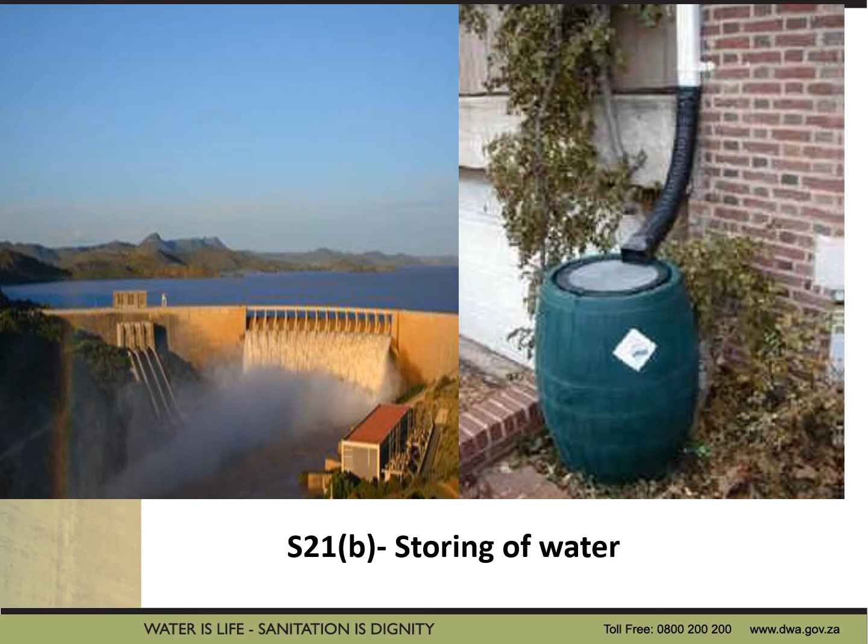We have Section 21B, which is storing of water in any impoundment. It could be an off-channel dam, in-stream dam, or even a JoJo tank.

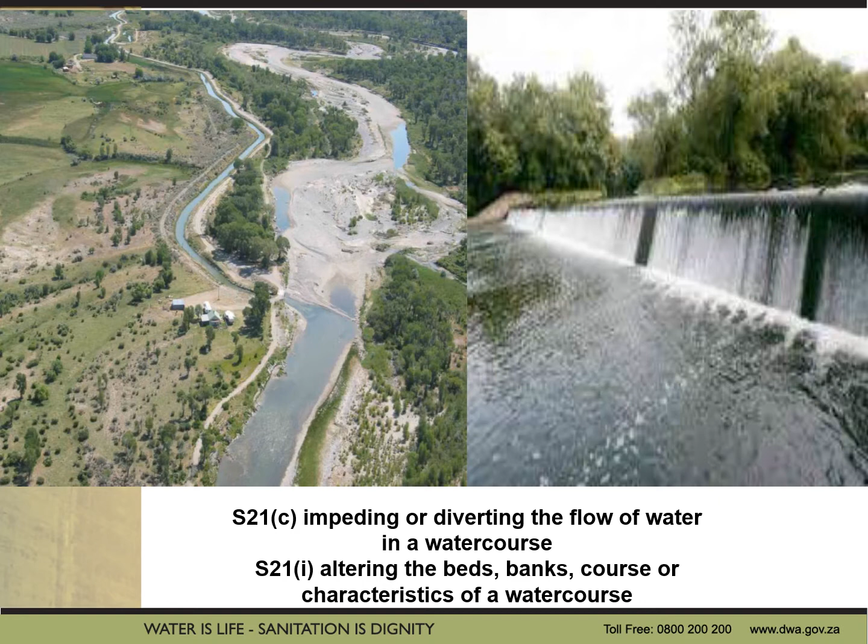Section 21D is engaging in a stream flow reduction activity, such as afforestation or plantation.

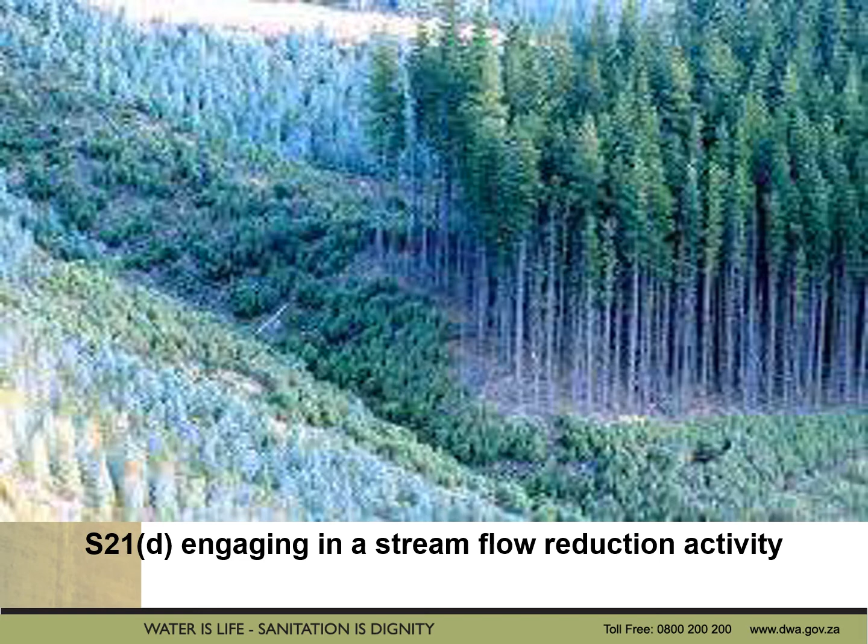Section 21E is engaging in a controlled activity identified as such in Section 37, subsection 1. An example of that is irrigating with treated effluent.

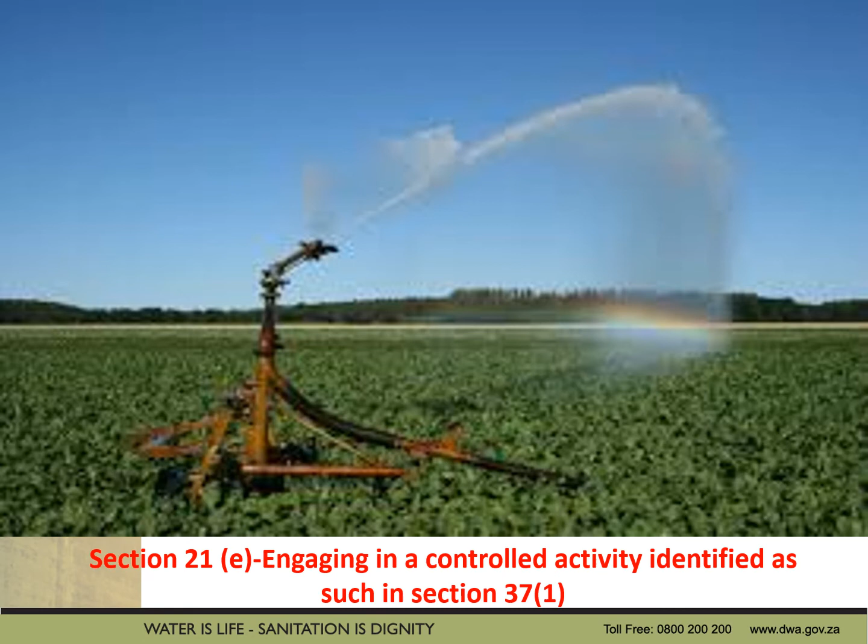Section 21F is discharging of waste or water containing waste into a water resource.

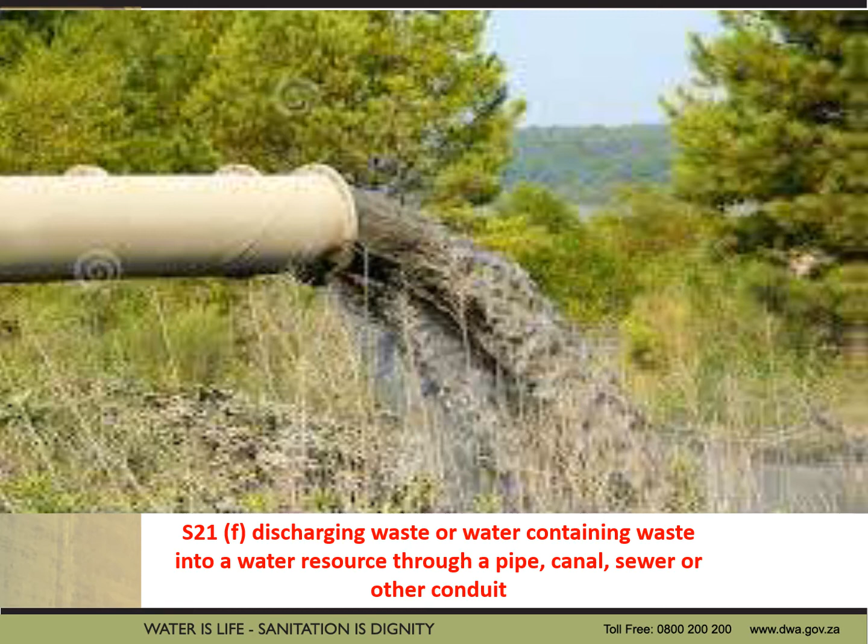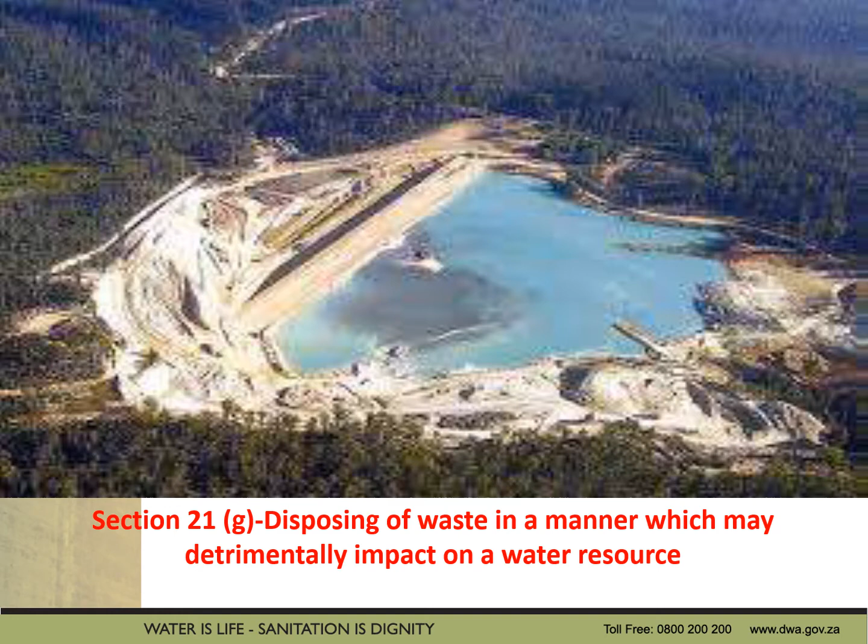Section 21G is disposing of waste in a manner which may have a detrimental impact on a water resource. An example is oxidation ponds or evaporation ponds.

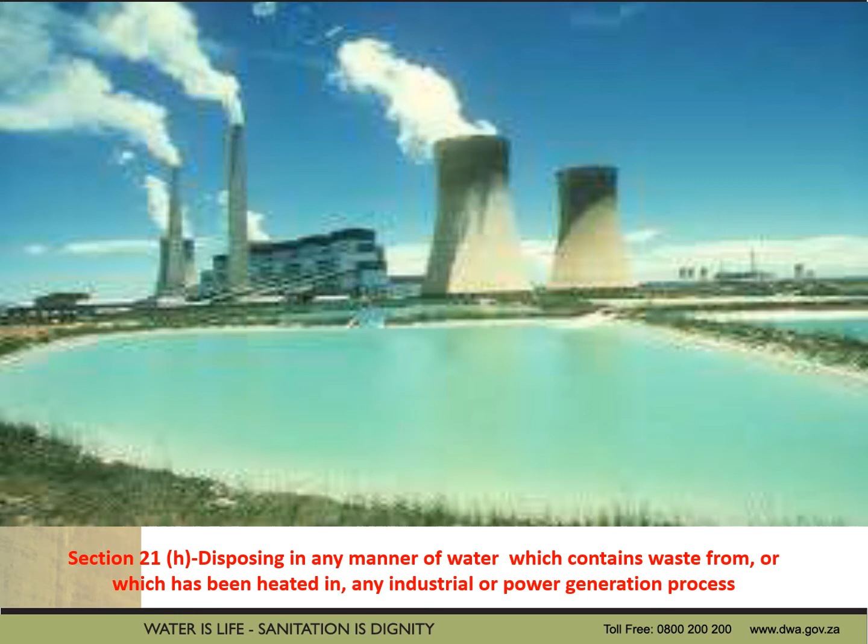Section 21H is disposing in any manner of water which contains waste from or which has been heated in any industrial or power generation process. So the difference between 21G and H is that G was never heated, and 21H is wastewater that has been through an industrial process.

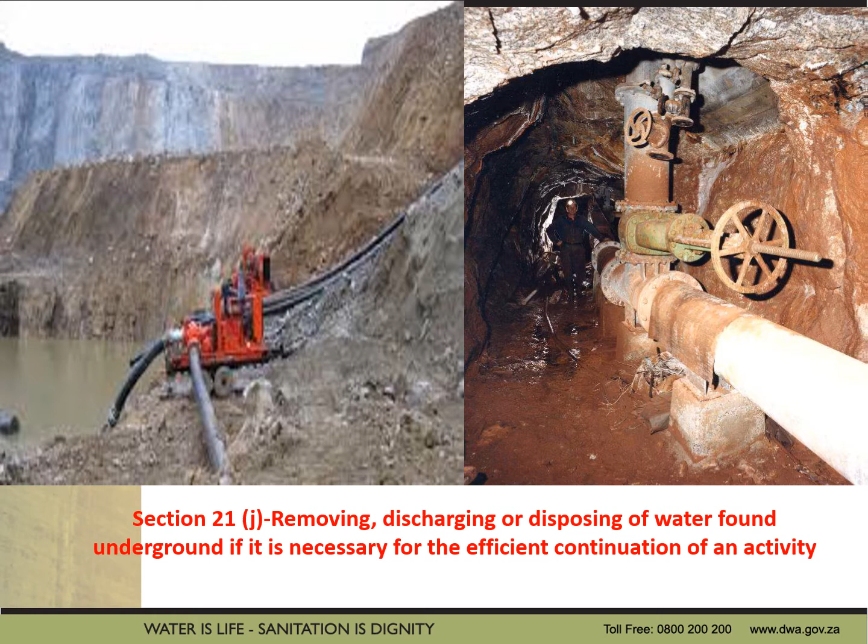Section 21J is removing, discharging, or disposing of water found underground if it is necessary for the efficient continuation of an activity. This is normally for mining activities wherein water is dewatered, so that mining activities can continue.

Lastly is Section 21K, which is using water for recreational purposes. An example is swimming or even canoeing.

Let's look at the strategies developed by the department to keep water resources healthy by controlling the impacts from the water use activities we just discussed.

Number one, we have resource directed measures. These are measures developed to protect the water resource for their sustainable utilization. RDM consists of three important aspects. Number one is classification, which is setting of appropriate levels or classes for protection of a water resource. We have the reserve, which is the quantity and quality of water required to satisfy basic human needs by securing basic water supply for the people, and also to protect aquatic ecosystems in order to secure ecological sustainable development and use of the relevant water resource. And number three, we've got resource quality objectives.

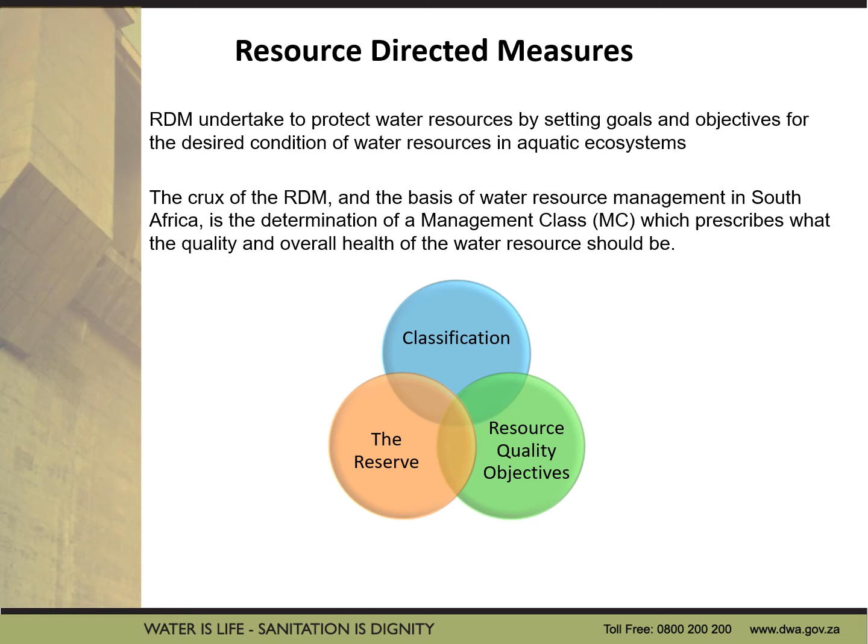This provides goals within the management class. They are set by the minister during the process of classification of significant water resources in South Africa. The main purpose of the RQOs is to establish clear goals relating to the quality of the relevant water resource.

The second strategy is the source directed measures, which specify criteria for controlling water resources activity and their associated impact on the aquatic ecosystem. They are imposed through the water use authorization, be it a license or a general authorization, through regulations and best practice guidelines, and also by providing incentives to water users.

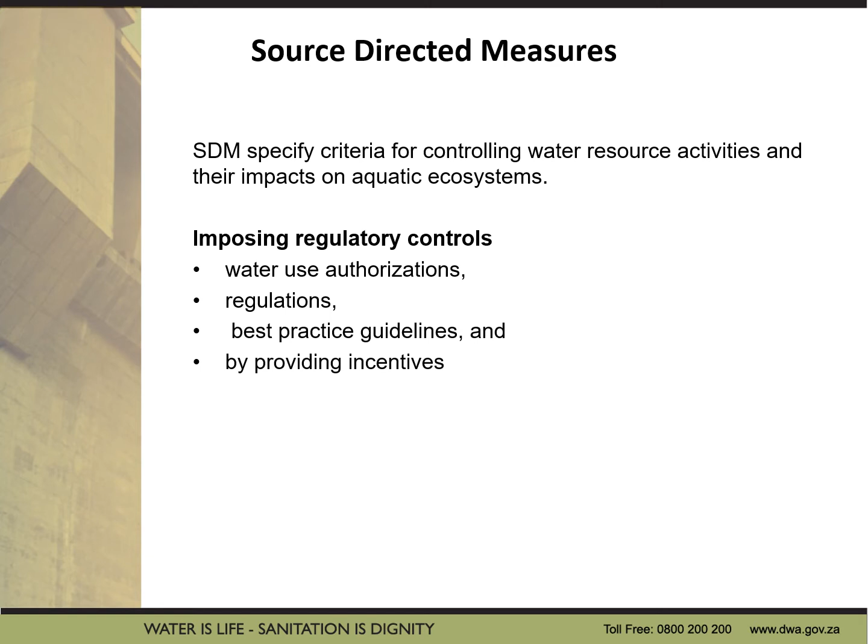Section 22 of the National Water Act provides 5 different ways in which water users could be authorized. We've got Schedule 1, which is mostly using water for reasonable domestic use, taking water for drinking, or irrigating your small garden, but it should not be for commercial purpose. Also abstracting for livestock watering, storing water from your roof, or using water for recreational purposes.

Number 2 is general authorization, where the department issues a notice in the government gazette authorizing a category of persons to use water subject to the conditions stipulated in that gazette. We've got general authorizations published for water quality related water users, for C and I, and for A and B water users. If a water user falls within the ambit of a general authorization, that water use must be registered with the department, and the general authorization is only valid and reviewed every 5 years.

Number 3, we've got existing lawful water use. This is the water that has been lawfully used during the qualifying period. If the water use was not used during the qualifying period, it may not be declared as an existing lawful water use. This existing lawful water use is determined through what we call the validation and verification process, where the extent of the water use is validated and also verified if the extent was lawful during the qualifying period.

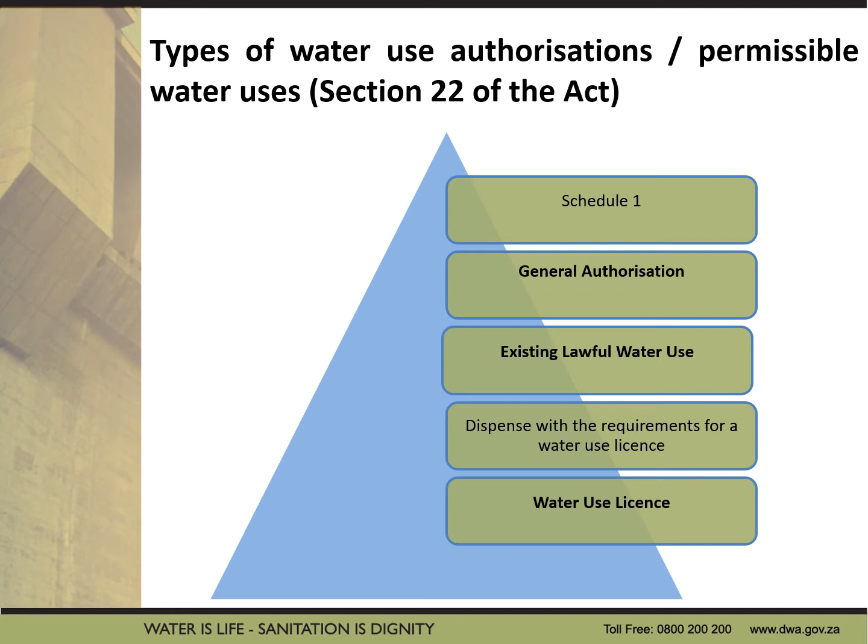This water use license is for high impact water users, where specialized studies will be required. The specialist studies must address environmental aspects and the impacts associated with them, and also mitigation measures to ensure the receiving environment is protected from that proposed development.

Now let's see how the principle of duty of care is implemented through the National Water Act. Section 19 of the National Water Act states that an owner of land or a person in control of land which causes, has caused, or is likely to cause pollution of a water resource must take all reasonable measures to prevent such pollution from occurring, recurring, or continuing, and must also take reasonable measures to ensure it is rehabilitated to its original state.

Section 20 of the National Water Act provides guidance as to how the department needs to respond when there is an emergency incident. So if there is an oil spillage from a truck, how should the department respond, and which measures need to be taken, is contained under that section 20.

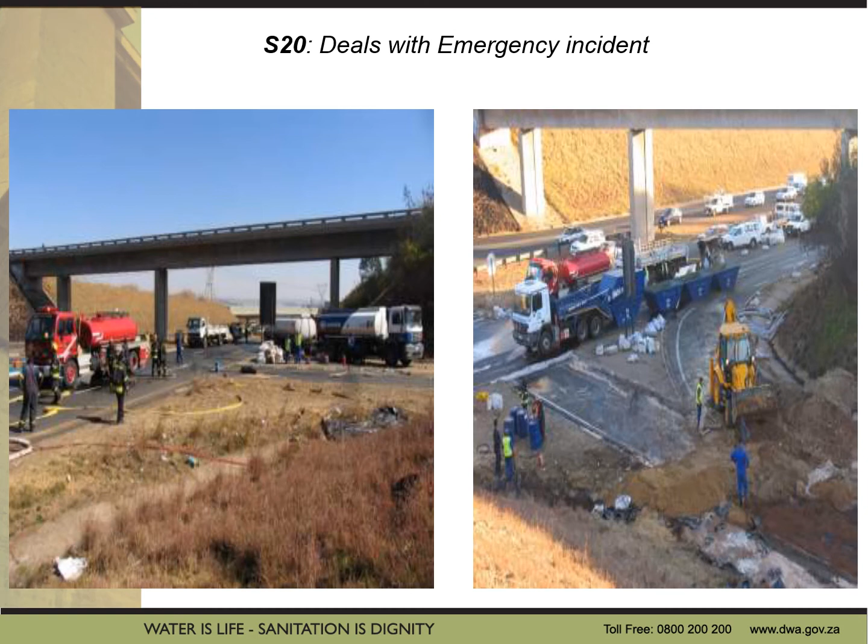Now let's look at the offenses in terms of the National Water Act. Section 151 of the National Water Act provides a list of offenses.

Number 1, it states that no person may use water otherwise than as permitted under this act, fail to provide access to any books, account, document, or asset when required to do so under this act, fail to comply with the conditions of an authorization, fail to comply with a directive issued under section 19, 20, 53 or 118, unlawfully and intentionally tamper or interfere with any waterwork or any seal or measuring device attached to a waterwork, or fail or refuse to give data or information, or give false or misleading data or information when required to do so under this act.

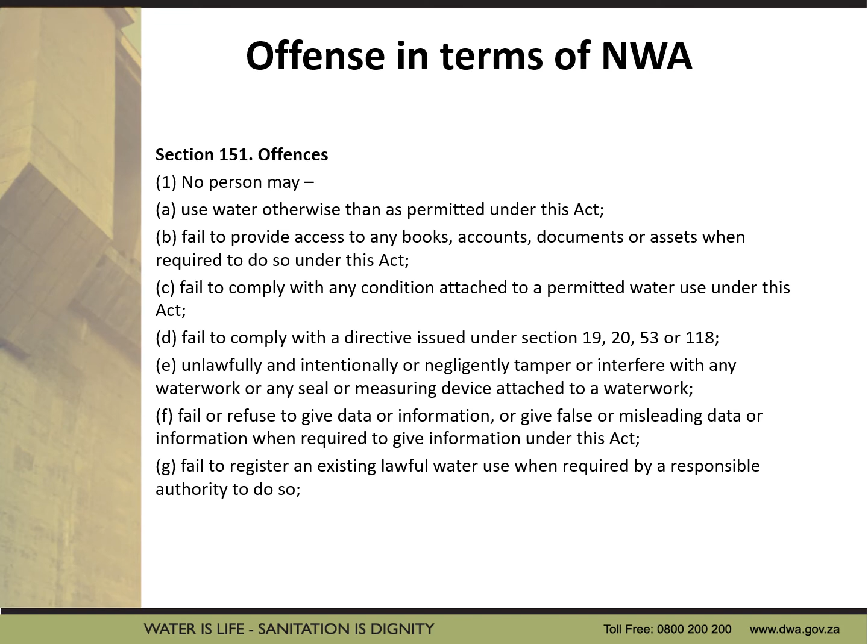Further offenses include failing to register an existing lawful water use when required to do so by the department, intentionally refusing to perform a duty or obstructing any other person in exercising any power or performing any duties in terms of the act, unlawfully and intentionally committing any act or omission which pollutes or is likely to pollute a water resource, unlawfully and intentionally or negligently committing any act or omission which detrimentally affects or is likely to affect a water resource, failing to register a dam with safety risk, failing to comply with the temporary restriction on the use of water in terms of item 6 of Schedule 3, and committing contempt of the water tribunal.

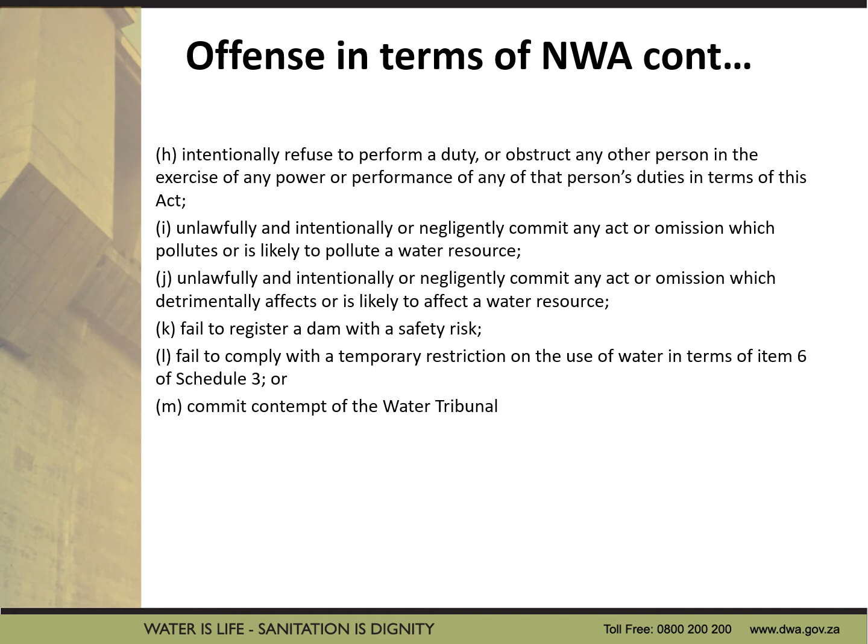Let's look at the different types of enforcement actions that the department can institute against a transgressor. Number one is informal mechanism wherein verbal or written warnings are issued. Number two, you've got administrative actions wherein a directive or pre-directive can be issued against a transgressor, wherein we can withdraw or suspend an authorization or restrict a supply to a water resource.

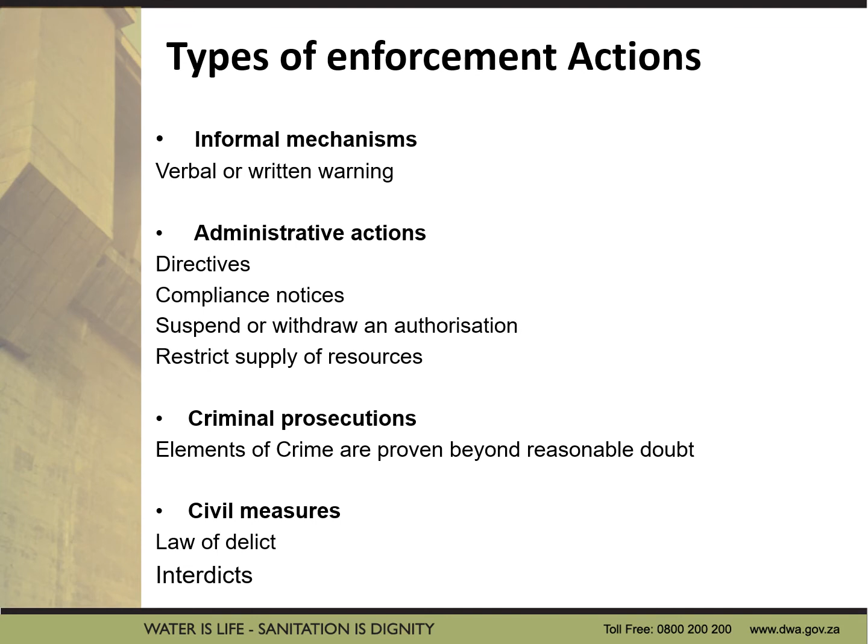Number three is criminal prosecution. This goes to court, however, the elements of crime must be proven beyond reasonable doubt. And number four is taking civil measures against the transgressor, whereby the law of delict must be proven, and the court will then issue the interdict to the transgressor.

Let's look at the water quality challenges that we are faced with in catchment management. We will see that we've got dilapidated, over-age infrastructure, sewer infrastructure to be more specific. You see that we've got a manhole that is overflowing, so that overflowing manhole will eventually discharge that raw sewage into a water resource.

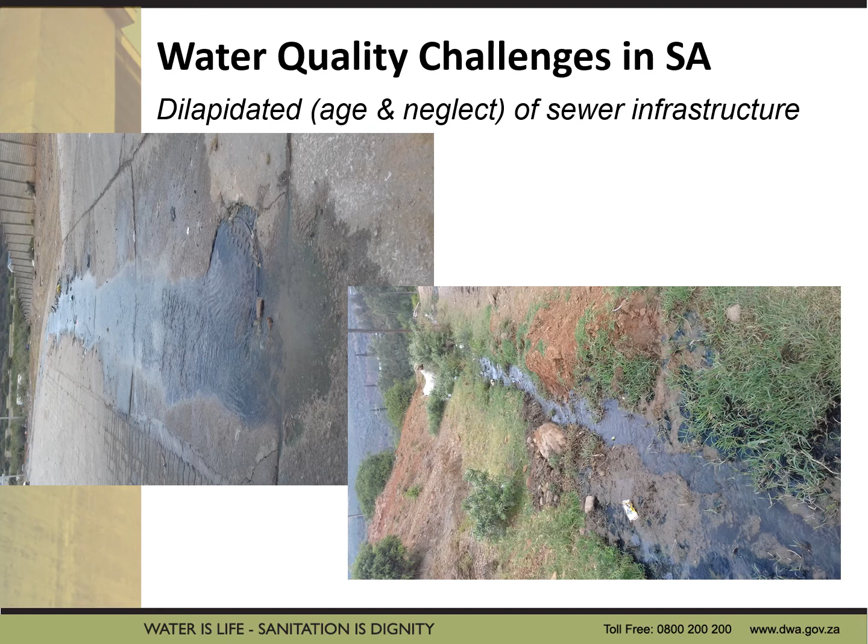Number two, you've got heavily polluted stormwater. In some cases, that overflowing manhole is either going to discharge into a water resource, or it's going to discharge into a stormwater channel, which will then discharge into a water resource. We also see that some industries are discharging their heavily polluted, untreated wastewater into the stormwater channel, and informal settlements as well are a problem, using the stormwater to dispose of their grey water.

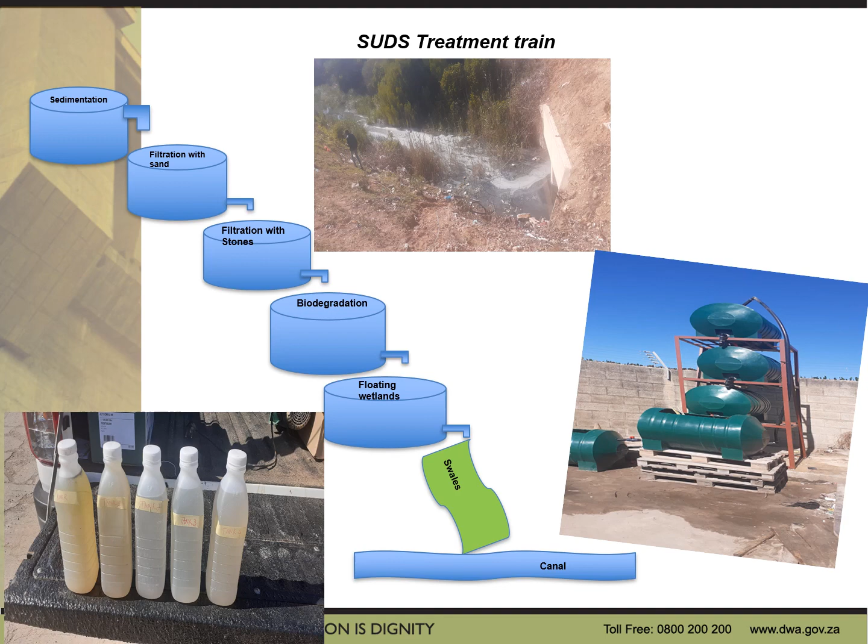Number two, it's using bioremediation for stormwater retention ponds. We've got a series of stormwater retention ponds in the Swartkops River catchment. As I've indicated, we've got a problem with settlements - most of them use the stormwater channels and infrastructure to dispose and discharge grey water. So we are trying also to treat water that comes from the stormwater retention ponds that are discharging directly into a water resource, by introducing floating wetlands and also bioenzymes to treat that waste before it goes into water resources.

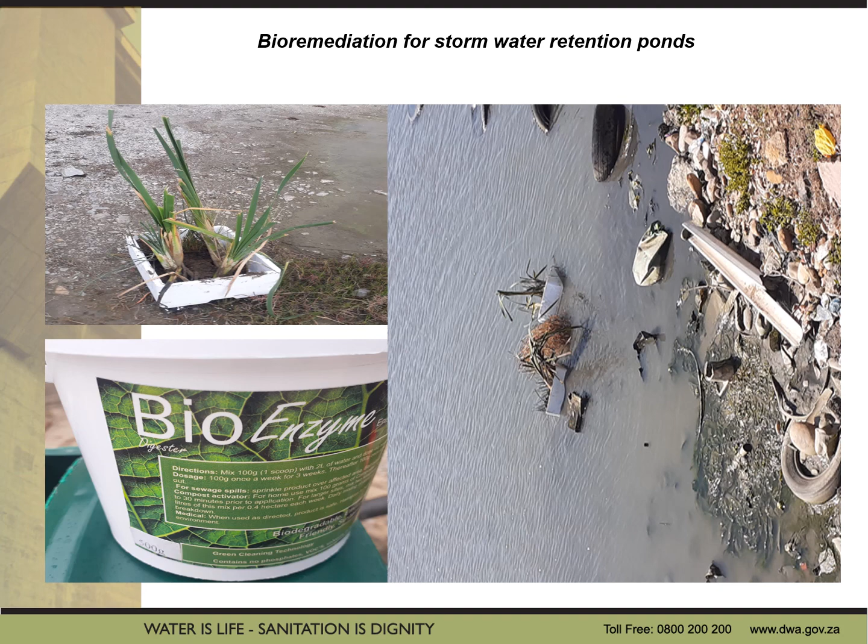Number three, we are using a combination of ozonation and photolysis for wastewater disinfection. We know that normally our wastewater treatment works use chlorination for the disinfection process. In this case, we want to determine the effectiveness of using these two mechanisms individually and also combined.